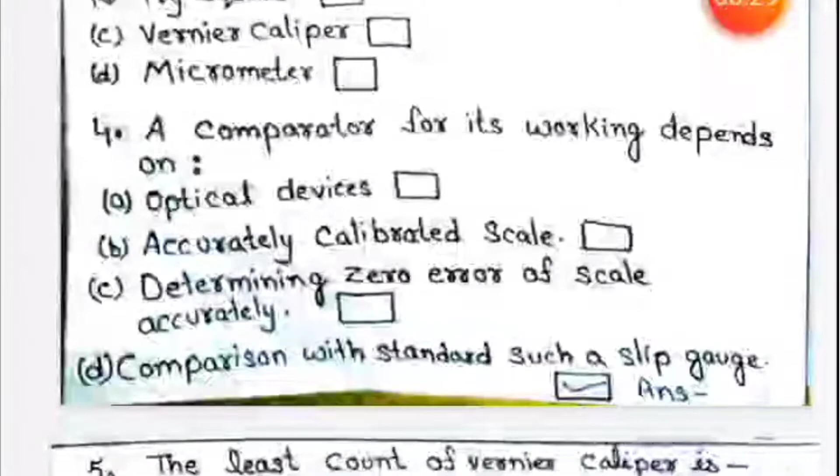A screw jack is used where we need linear motion. A steel rule is most commonly used in workshop for measuring components of limited accuracy. A comparator's working depends on comparison with standards such as slip gauge.

The least count of vernier caliper is 0.02 mm. The degree of closeness of the measured value of a certain quantity to its true value is known as accuracy.

What is the value of flatness for the surface upon which slip gauges are wrung? 0.001 mm. Vernier bevel protractor is used for checking linear measurement, angular measurement, and taper measurement - all of this.

Vernier bevel protractor is used for checking angular measurement. 1 inch is equal to 25.4 mm.

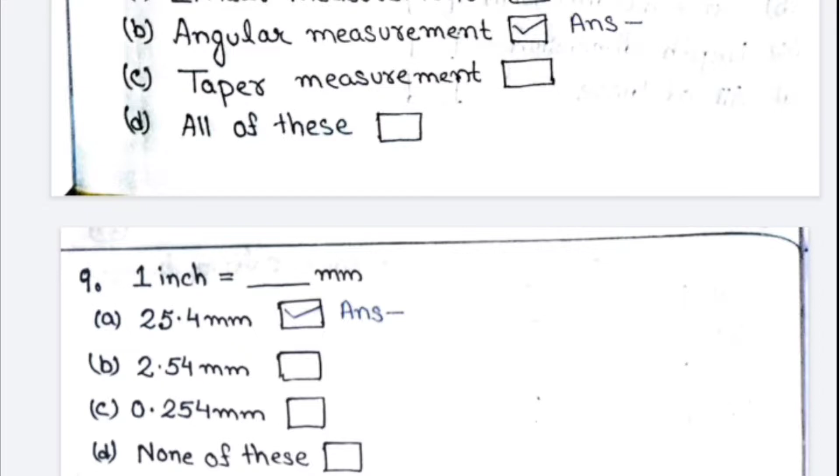Which among the following is measured using the four-ball method - diameter. The straight distance covered by a nut or bolt in one rotation is called lead.

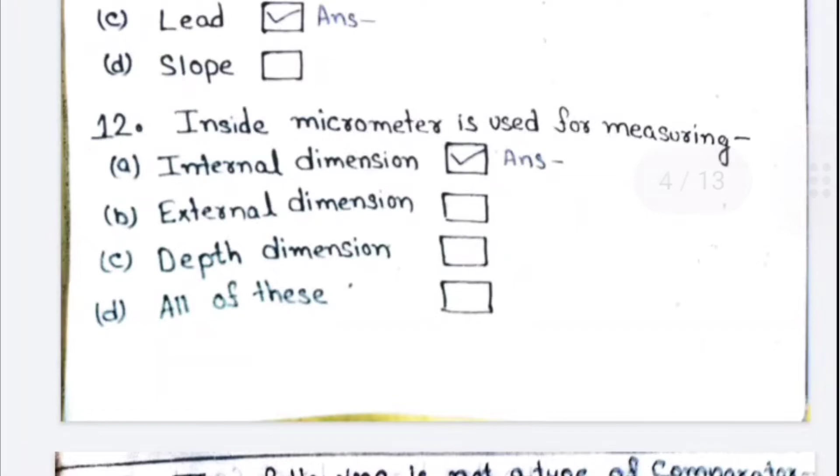Inside micrometer is used for measuring internal dimensions. The following is not a type of comparator: hydraulic. The angle of buttress thread is 45 degrees.

Examples of precision measuring instruments include vernier caliper, dial test indicator, outside micrometer - all of this.

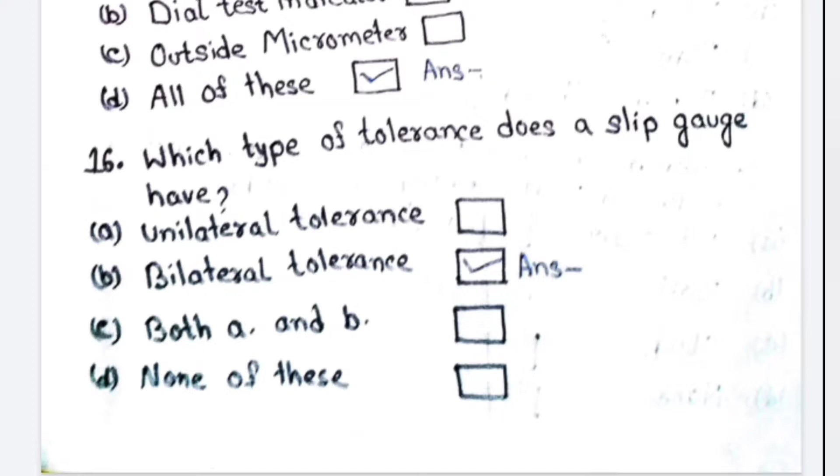Which type of tolerance does a slip gauge have? Bilateral tolerance. Dial test indicator has a least count of 0.01 mm.

Which of the following is not a type of direct measuring instrument? Divider. Thread micrometer can measure the thread pitch.

Thread micrometer can measure the pitch of the thread. Which fastener prevents relative motion between parts being connected? Set screws.

0.01 mm. The following is not used to measure angle: optical flats. Bevel protractor, calibrated levels, and clinometer are used to measure angles.

The crest diameter of a screw thread is the same as major diameter. The precision measuring instrument should possess the following characteristics.

All of this: high degree of accuracy, proper calibration, less... The U frame in outside micrometer is generally made of both A and B, cast iron and cast steel.

Testing flatness or straightness of a surface is possible using an autocollimator. The following parts are available in a micrometer: ratchet.

The following part is not available in vernier caliper: angle is not available in vernier caliper.

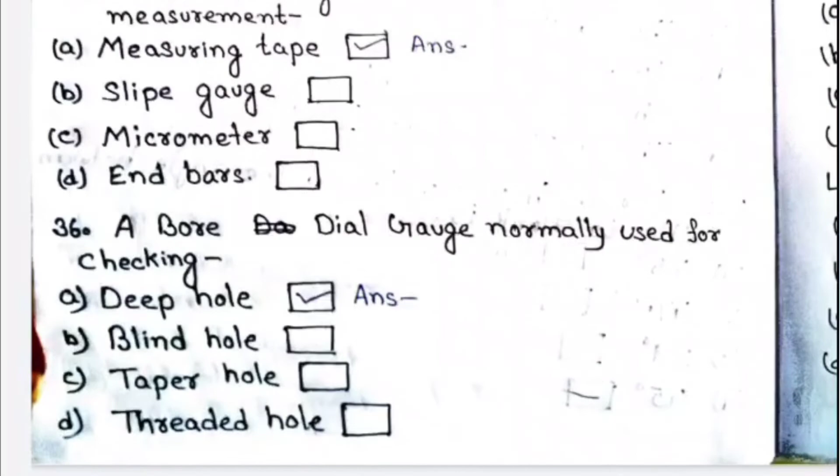The following is a line standard of measurement: tape. A bore dial gauge is normally used for checking deep holes.

Pass meter used for checking external measurement. 0.01 mm measurement can be achieved by micrometer.

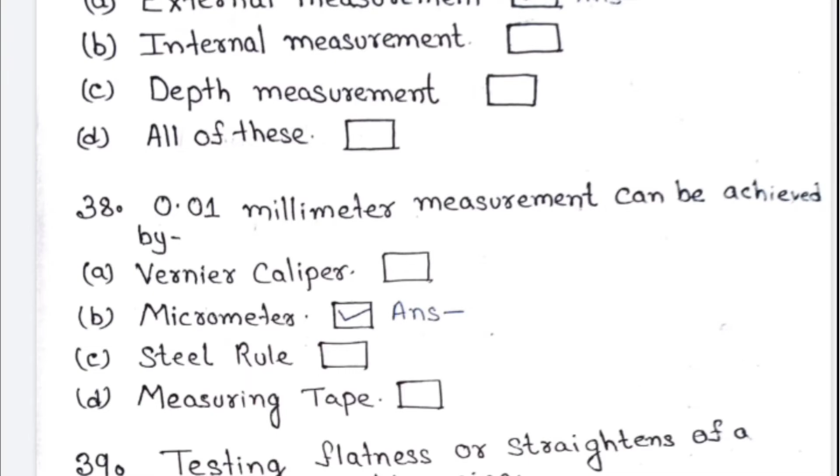Testing flatness or straightness of a surface is possible using autocollimator. Acme thread is usually used in lathe machines.

What is total error in micrometer? Maximum difference between ordinate of cumulative errors.

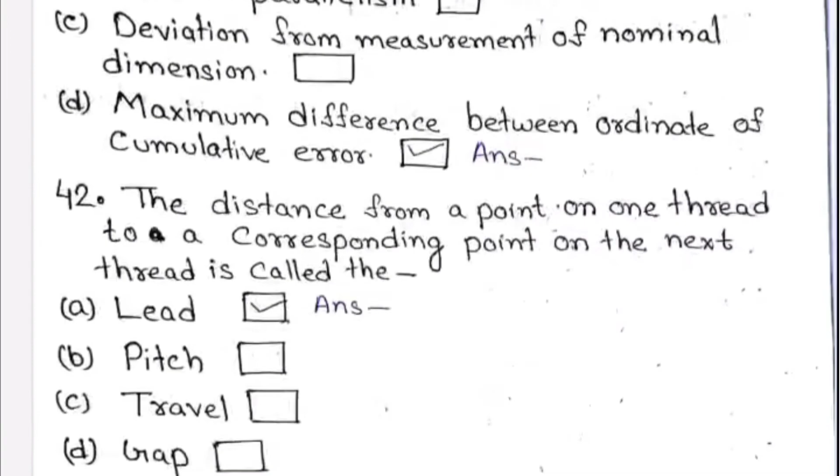The distance from a point on a thread to a corresponding point on the next thread is called lead. The root diameter of a screw thread is the same as minor diameter.

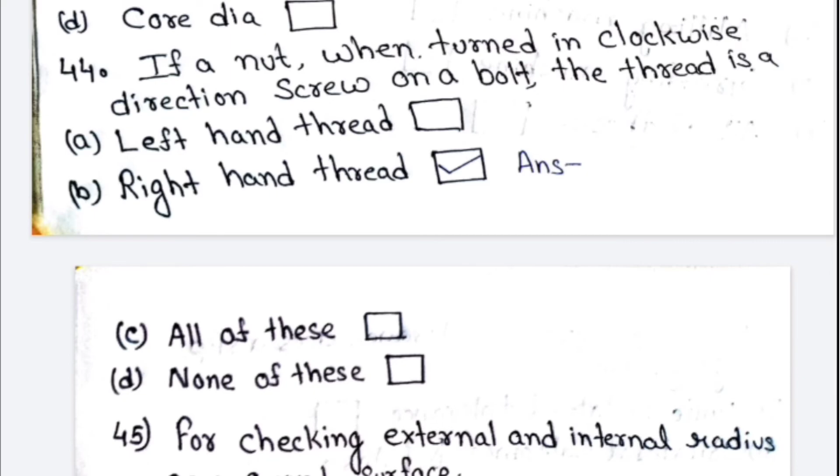If a nut when turned in clockwise direction screws onto a bolt, the thread is right hand thread. For checking external and internal radius on a curved surface, use a radius gauge. 9 micron is equal to 0.009 mm.

Error of measurement is equal to true value minus measured value. The sine bar is made of high carbon steel.

Which type of tolerance does a slip gauge have? Bilateral. 1 radian is equal to 57.29 degrees.